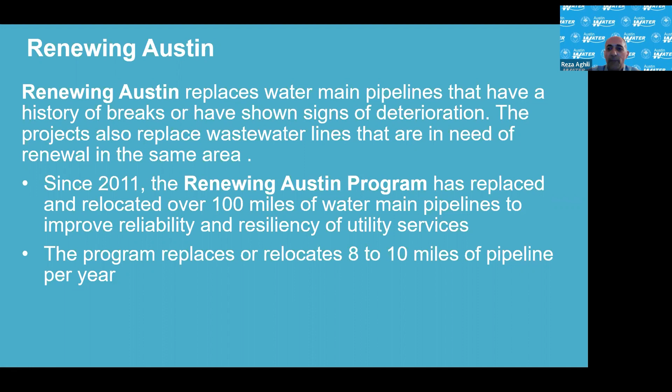So I'll go over the project overview. There's about 9,300 linear feet of aging water and wastewater lines that are going to be replaced as part of this project. 23 fire hydrants will be replaced, and some will be placed in new locations to meet current spacing requirements. Construction is scheduled to start this month, February 2023, and will take around 15 months to complete, and roads will be resurfaced after construction.

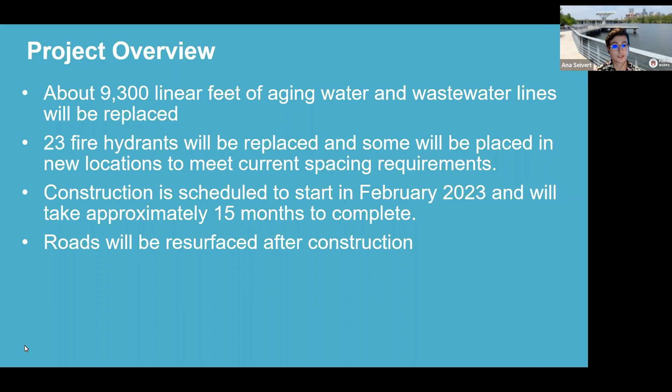So this project will use open trench cutting. Open cut is a method of pipeline installation that requires opening up the surface of the street to the required depth for installing a pipeline. These images show what you can expect to see. The contractor will dig a trench and then cover up everything in the evening at the end of their workday. The crews will coordinate with homeowners and residents and alert them ahead of time if there are any access challenges while working in front of homes and driveways.

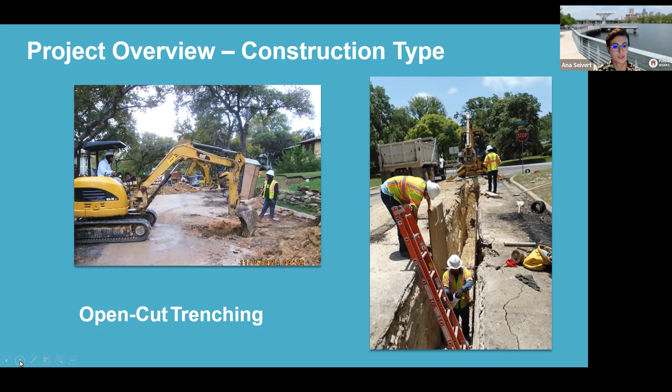The contractor will use heavy equipment to dig trenches for the new pipelines, and the roads will be patched after the line is installed. All roads will be repaved at the end of the project. Crews will work in front of your property a number of times to complete each phase of the project, including excavation and pipe installation.

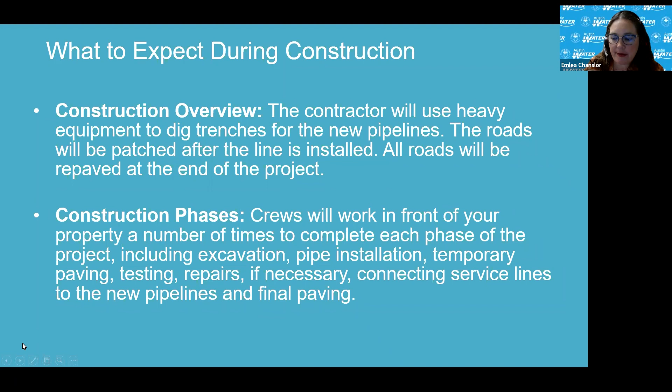I'm sorry, I had everything froze up for me. So you're waiting for me to advance? Yes, sorry. Okay, I think we had a little bit of a Zoom glitch there, so I'm glad we're back. Okay, here we go. All right, awesome, thank you.

Most of the work will be limited to the right-of-way. In a lot of cases, this might be 10 to 15 feet behind the curb in an area you might consider part of your lawn. Some storm drain work will be done between homes in an existing easement if applicable. It might be necessary for you to remove landscaping or other personal items in the right-of-way before new service lines are connected. This image shows where a meter box might be located in the right-of-way, and this is what we'll need to connect for service.

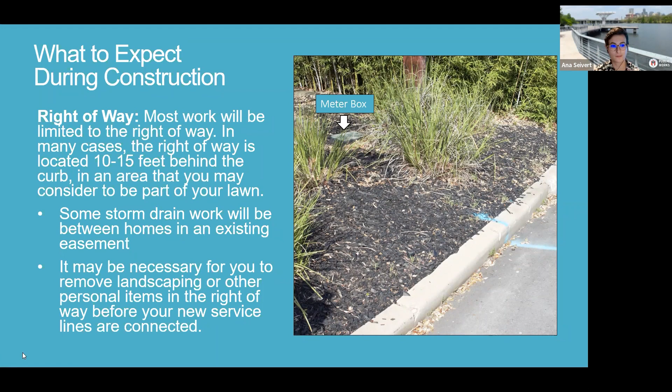The contractor may also need to do some tree trimming over the right-of-way if trees are hanging lower than 14 feet, to ensure there's a clear work area. So just something to look out for.

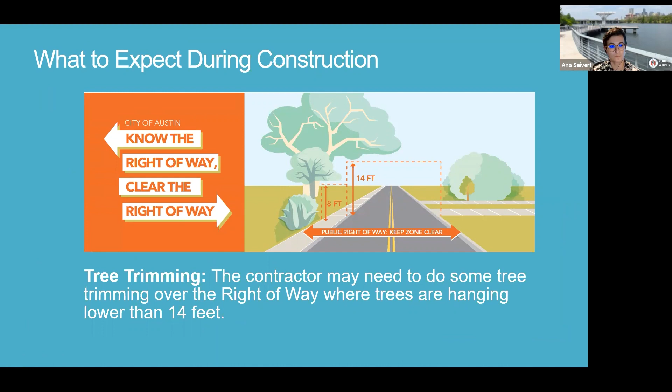Streets will be closed to through traffic with detours provided. You'll have access to your home, however, for brief periods of time, driveway access might be limited. Again, the contractor will coordinate with residents if there are access challenges.

For utility service, there might be a point where your water or wastewater service will be temporarily interrupted to connect the new line, but it's likely just for a couple hours or a few hours on a single day. We'll notify you by flyers posted on the door prior to turning off the water. Emergency outages are possible, so should a water line break during construction, it will be treated as an emergency break and handled as quickly as possible.

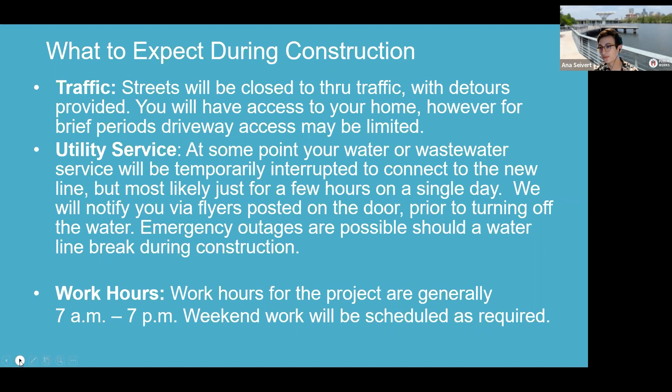For a project like this, general working hours are 7 a.m. to 7 p.m., and weekend work will be scheduled as needed.

If you'd like to stay up to date on the project, you can sign up to receive updates by email at austintexas.gov/bartonhills. Notice will be provided to residents at least 48 hours in advance of a water shutoff, done by either the project inspector or the contractor leaving notices at your door. This meeting is being recorded and will be available for you to reference if you'd like, and you should be able to find it at that website.

That's it for me. Emlea, did we want to open it up for questions, or do you want to touch quickly on how folks can submit questions.

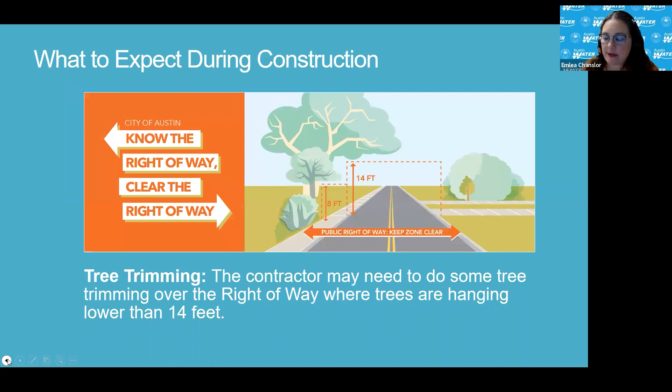Yes, hold on just a second, I was trying to find our latest schedule we had on that job. Let's see, here we go. I'm going to click back to the map so we have that for reference. So we've got, if we start, say the middle of next week, I think is what we have right now. It'll probably be, if not next week, probably the 20th.

Deverne will take a little longer than the rest of the streets because there is water and wastewater on it. That being said, we should be done probably the second or third week in May is what we show right now. That's okay, including pushing it back a week, so say the 10th or 12th of May.

So that's your current estimate for that work on Deverne. Will you do the wastewater line first and then the water line? Yeah, wastewater will go first. It's the deepest. So what will probably happen is we'll open cut the wastewater main, run the services basically to your property line or just behind the curb. At that point we test the line, we coat the manholes, and then we'll go through and come back and start hitting each one of the services, actually making it go live into the existing wastewater main.

The same will be done for your water services as well. It won't take as long with the water because it's less deep, but we will go behind the curb line, stop it, test it, then go back and connect each one of those.

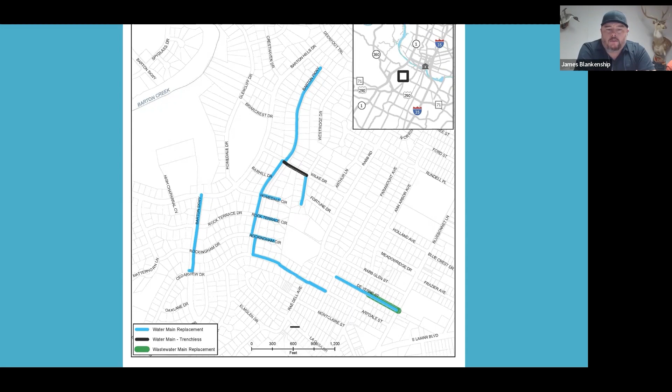So again, one of the keys is making sure people are able to move their cars, the ones parked on the street or even in the driveway. If you're able to push those down, anything to get out of our way makes it a lot easier. So the crew will be knocking on doors that morning before they start the work that would block the driveway. So if you could answer, or at least be alert when they're knocking, you'll have the opportunity to move your car so you can get in and out during that day whenever you need to.

Okay, next question: will Deverne be paved after completion of Deverne or after the whole project is done?

We are going to try to pave these in sections as they get done. More than likely Deverne will be, and Barton Skyway will be. The rest will probably take out larger chunks, so as we're working in Rockingham, Terrace Circle, Homedale Circle, those will take a large chunk out of that.

I would say we're probably going to break this whole job up into 4 mobilizations in paving and milling. So Deverne is one, Barton Skyway is another, and Barton Skyway might actually be a part of this one. But if you can imagine, Barton Hills all the way down to those little side streets will probably be broken up into 3.

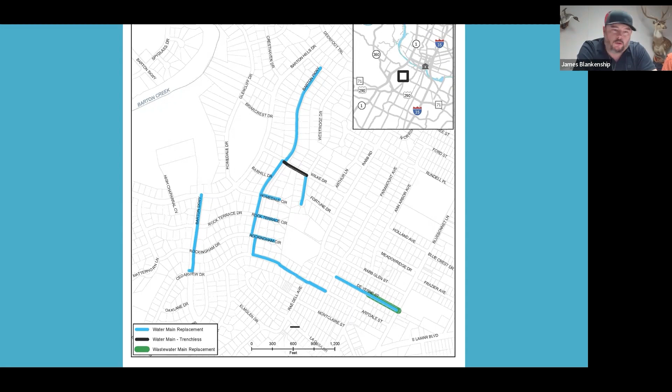And then obviously the services - if we're working on the east side of the drive, that west side service will be crossing all the way across. So for every house that's on the west side, if you're on the east, it will go all the way across the road. Thank you.

Okay, so someone has said, sounds like James has a rough timeline. Can you share what that timeline is by street? Understand it as a current estimate. So Ana, I think that's probably for you to take.

Yes, we do want to be thoughtful about the timeline in terms of things that could come up where one street gets moved up versus another, because there could be unforeseen challenges or things of that nature. So that's something that James will be updating us on, and we'll be passing on to y'all once we know, because we have to make sure we're understanding all of the conditions as they're out there working.

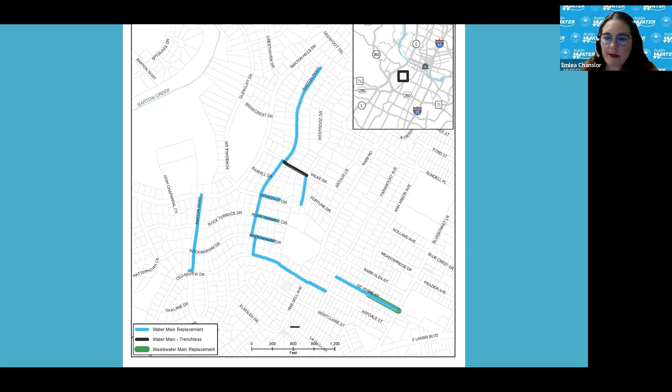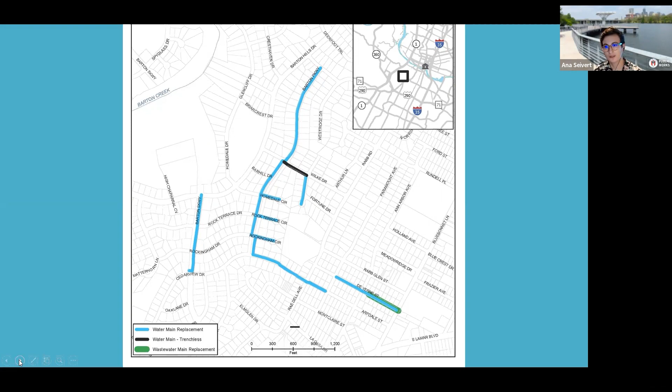I can add that right now the current status is that James's crew is waiting on final right-of-way permits that allow them to work within the right-of-way. Once we get news about that being processed and approved, we can update folks on the email list with a status of when work is actually going to start. But that's kind of the only thing pending right now.

Yes, and I did put in the chat at the beginning of the meeting the link to our project website. It's austintexas.gov/bartonhills, and you can find there where to sign up to get emails about the project. I've also put up on the screen the project team contacts. You heard from Oscar briefly earlier.

I always like to spend a little time talking about what the construction coordinator or inspector's role is, because they really make these projects work. You'll see Oscar out on site, and he is the city's representative for this project. He'll be working with the contractor to help them troubleshoot, to oversee their work, and he'll also be a contact for residents. We've provided his mobile phone number here, and you are welcome and encouraged to call him if there's a concern about access or a question about the work.

Sometimes folks want to know where the work will be happening, and often our construction coordinator can stop by with his set of plans and show you where the line's going in and how that relates to your property. Oscar, I don't mean to put you on the spot, but you and your colleagues are the glue that makes all this happen, and you're a great liaison to the community. Ana and I will also be available to answer questions, but you're going to be seeing Oscar's face out there more than ours. Anything you want to add, Oscar?